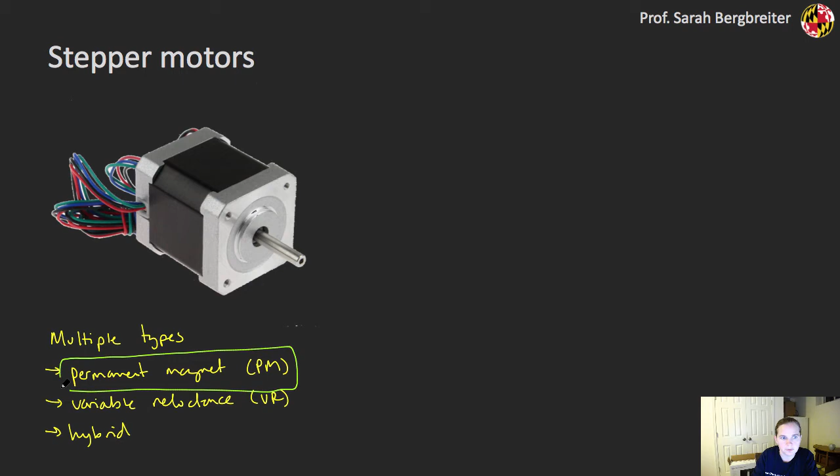So as we mentioned, these stepper motors allow us to get discrete steps in our actuation. So I can move from here to here in a particularly defined way. I don't necessarily need a sensor like we would have on a servo motor with a DC motor. This is built into the structure of the motor.

And the way this works is I have a rotor, and that rotor is going to have some poles associated with it. In this case, I've drawn one pole right here. And then I'm going to have coils on the stator. And these are hooked together such that this would be A and A prime. So the circuit equivalent of that is I'd have A and A prime connected together in series right here. So I have a single current basically going through both of these coils together.

And I have multiple of these poles on the stator, or we often call them phases as well. If I were to draw a two-phase permanent magnet stepper motor, in this case I have B and B prime, and I have my equivalent circuit over here. So this fixed thing right here is going to be my stator.

That's what's going to have the stator coils on it, and the number of stator pole and coil pairs, so that would be like A and A prime, B and B prime, in this case I have two of those, is going to be the number of phases in my motor. So in this case I have a two-phase stepper motor. If I also had a C and a C prime and a D and a D prime, then I'd have a four-phase stepper motor.

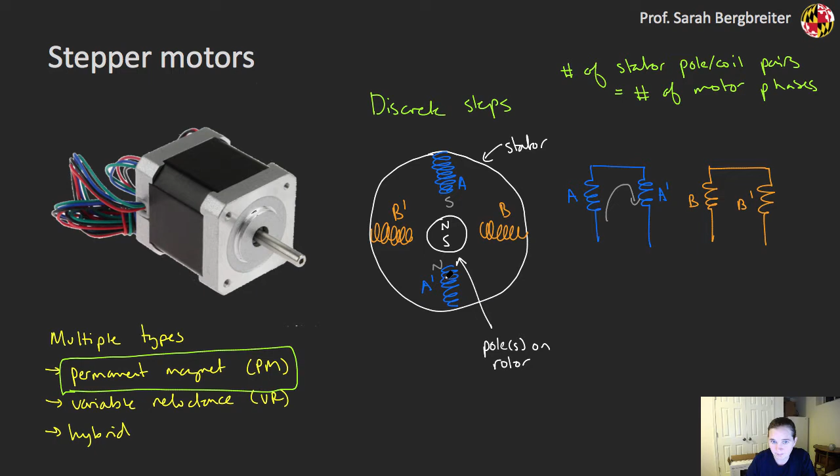Now, the basic idea behind this is that I'm going to run a current through these coils such that I set up these poles. For A, I would have a south pole. For A prime, I'm creating this kind of north pole, and my rotor will then line up with these poles on my stator. Let's go through the basic operation of how this motor would rotate around.

So I'm going to have a current going through those A coils, through A and A prime, such that I'm going from A to A prime, and these coils are designed such that that will give me a south pole on the A stator pole, and on the A prime I'll get a north pole right here. So effectively here I have a south right here and a north right here.

And what that's going to do is make sure that the rotor, and I'm going to use a single pole on the rotor, so a north-south effectively on the rotor, is going to line up in this direction. I'm going to draw an arrow here also indicating that, so we can see how that changes over time. I should also mention that when I have current going through this A coil, I have zero current going through my B coils. So that was my first step up here.

My second step is that I'm going to now have current going through my B coils, and I'm going to have this set up from B to B prime, such that B is now my south pole and B prime is now my north pole on the stator, and I have no current going through the A coils.

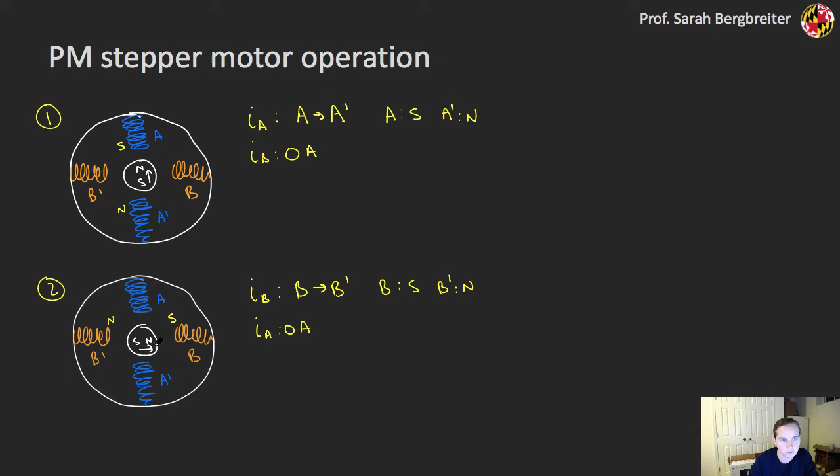And so once I've done that, now I've effectively created my north on the B prime, my south on B, and so that rotor is going to rotate to line up properly with that. So now I have north-south right here. I drew my arrow pointing to the north. So now I've rotated like this. This whole rotor has rotated in this direction.

So for step 3 here, I'm going to now have my current going backwards through those A coils. So I have a current going through A, but now it's going from A prime direction to the A direction. So A prime is now my south pole, A is now my north pole. I of course have 0 amps going through my B coil right here.

And so this is going to set up, in this case, a north right here, south right here, and I've moved from my north pointing toward B here to my north pointing toward A prime right here. So it's rotated again another step. And the 4th step here, I'm going to have B current, and I've rotated again in this clockwise direction.

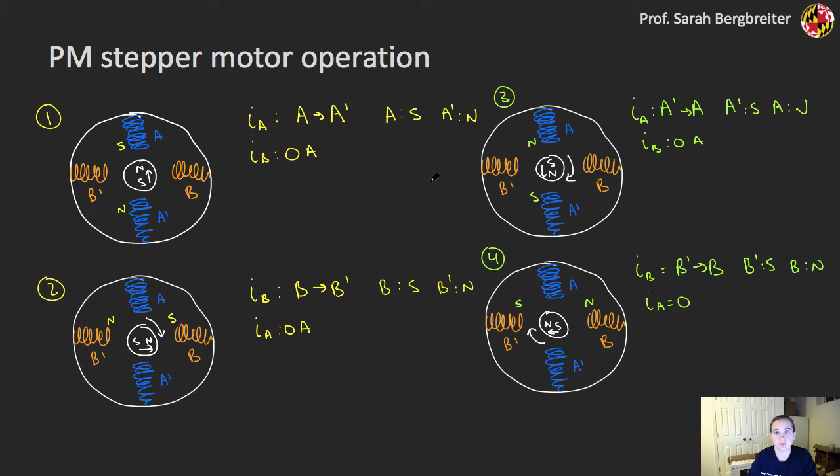So for this particular motor, I have 2 phases. I have 1 pole on the rotor, right? And there are only 4 steps here, so each step is 90 degrees. So I can position my rotor of the motor at 90-degree increments with this particular motor design. So obviously the number of steps is going to really determine the kind of performance metrics I'd be interested in for a stepper motor.

To calculate that, I'm going to define P as my number of phases in the motor and N poles as the number of magnetic poles on the rotor. And so my steps per revolution, I'm going to define as S. It's going to be 2 times P times N poles. Right? And this 2 times P is effectively the number of stator coils.

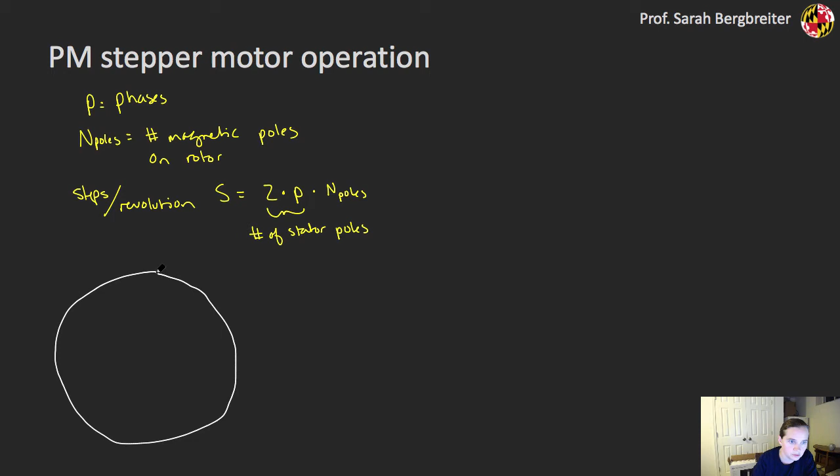So let's look at a far more complex example than I previously showed you with that 2-phase motor. In this case, I have 4 pairs of stator coils, 8 total coils there. So I have a 4-phase motor, so my P is going to be 4. I also have 3 different poles on my rotor, 3 different pairs of these north-south poles. So N poles here is going to be 3.

So the total number of steps in my stepper motor, S, is going to be 2 times the number of phases, 4, times 3, the number of poles on the rotor. So in this case, it's going to be 24 steps per revolution. And if I'm interested in the number of degrees per step, I'm going to take 360 degrees divided by S. So 360 degrees divided by 24 gets me 15 degrees per step.

So it's still a lot better than the previous example, when we had 2 phases and 1 pole on the rotor, in which case we got 90 degrees per step, or 4 steps per revolution. But depending on what you're trying to do, it still might not be great. So these are definitely a little bit limited in terms of the angular position that you can achieve from these motors.

So in addition to the stepping performance, another obviously important metric is going to be the torque that we get out of this motor. And the most important torque number that you'll probably get on a data sheet for a stepper motor is going to be the holding torque. That's the max torque that I can apply to that rotor before breaking that position.

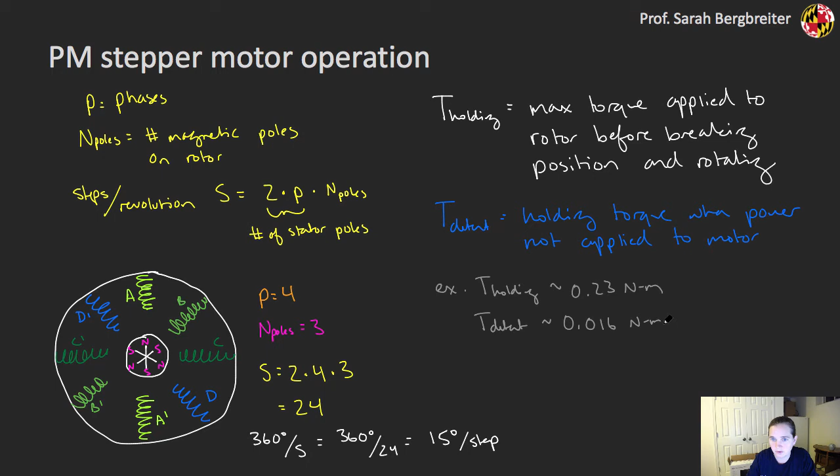So some typical numbers you might find for a particular stepper motor from a data sheet: your holding torque might be something like 0.23 Newton meters, and that detent torque would be more like 16 millinewton meters, so 0.016 Newton meters in that case. So significantly less, but still not nothing, right? That's definitely a reasonable torque.

My basic model for a two-phase stepper motor that I went through previously looks something like this, where I have the A and the A prime coils in series together and the B and B prime coils in series together. And when I run a current through in this direction, for example, I can set up particular magnetic poles on my stator poles. If I run a current through in a different direction, like this, I can set up the opposite magnetic poles.

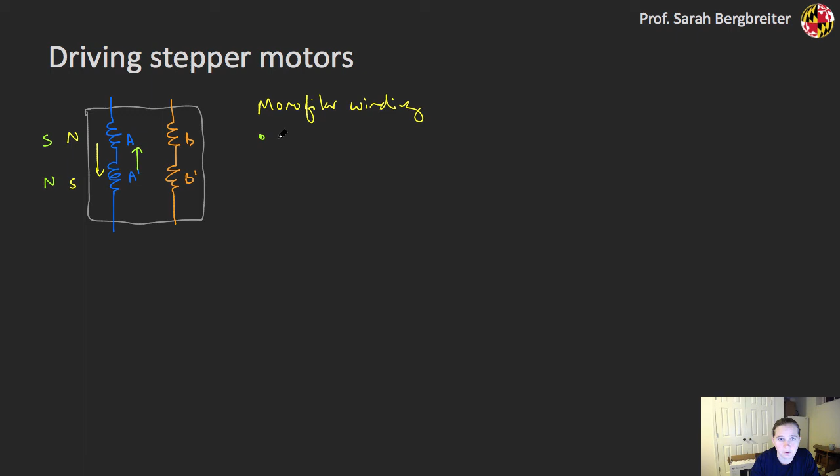So this particular configuration, and there are a lot of different winding configurations for stepper motors, but this is probably the most common, is called the monofilar configuration or monofilar winding. And a key point, if I'm thinking about how I'm going to drive these stepper motors, is that I need to be able to reverse my current direction. And these are going to require a fair amount of current, so typically more current than a typical digital logic system or a typical microcontroller can source.

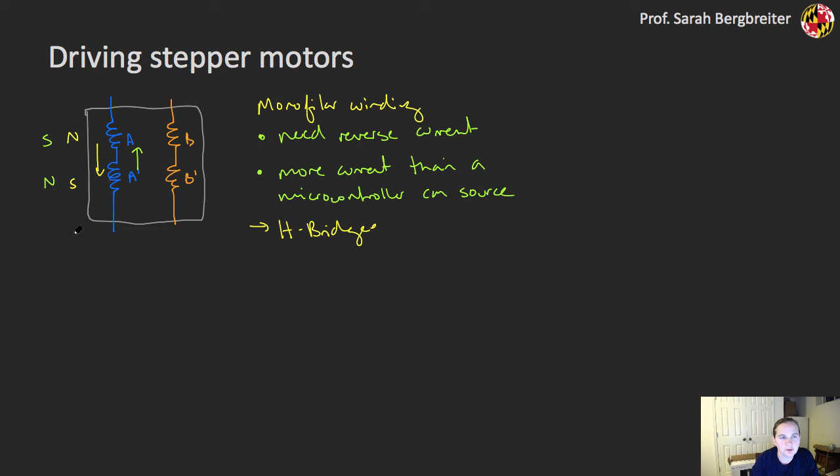So a great solution to this, of course, is H-bridge circuits. Of course, we'll need a full H-bridge for each phase, so the driving complexity and the circuitry required to drive stepper motors can be a little more complex than a basic DC motor. So here's our two H-bridge setup to drive this two-phase stepper motor. In this case, I have a full bridge on this side. Each of these is a half bridge effectively, and another full bridge on the other side to drive the B and B prime coils. And I've labeled these transistors Q1 through Q8.

I'm typically going to operate, for example, Q1 and Q4 together. So if Q1 and Q4 are both on, I'll get current going in one direction through here. If Q3 and Q2 are on, I'll get current going the other direction through here. And same on the other side, Q5 and Q8 are going to work together, and Q6 and Q7 are going to work together. So if I go through the steps that I went through previously to drive this two-phase stepper motor through the 4 steps that it's going to take, I'm going to start by driving current in this direction through my A and A prime coils. And to do that, I'm going to turn on Q1 and Q4 and effectively turn off everything else.

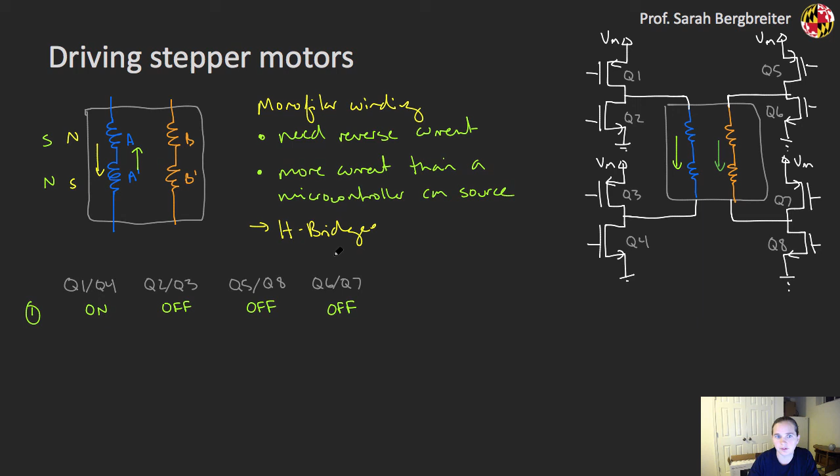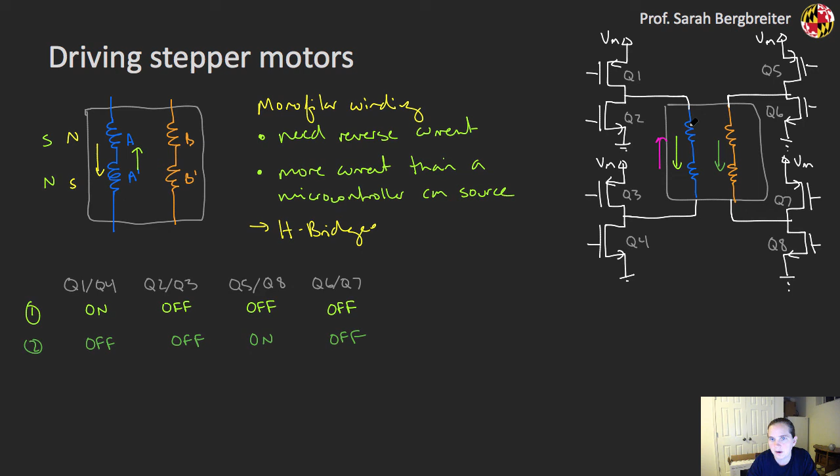Okay, the next step was to turn off current going through the A coils and turn on current going through the B coils in this particular direction. And so in that case, I want Q5 and Q8 to be on, and everything else should be off. Right, then I'm going to reverse my direction. So now I'm going to go back in this direction through the A and A prime coils. And to do that, I'm going to go from this V motor down here through Q3, through Q2 to ground. So Q2 and Q3 are both going to be on in this case for this third step, and everything else will be off.

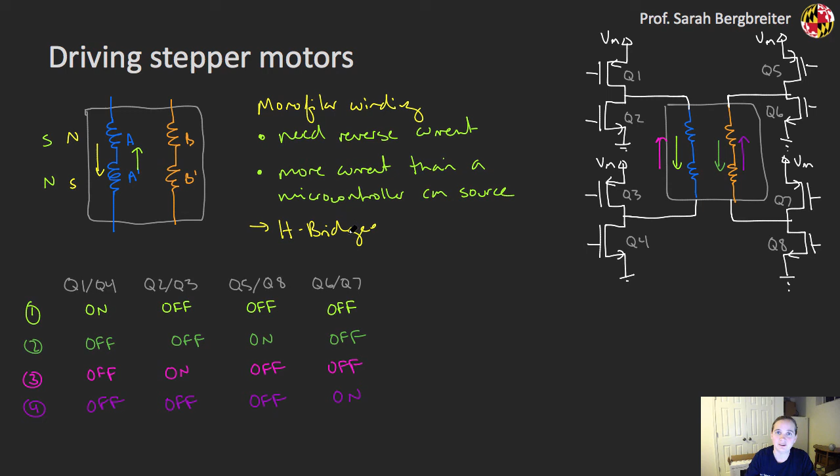And then finally, I want current going through the B coils in this case. So Q7 and Q6 are going to be on, and everything else will be off. And then, of course, I'm going to repeat. I'm going to go back to step 1, turn on Q1, Q4, turn everything else off. Right? So this would allow me to get through all of those steps. Obviously, if you have more phases, more poles, I'm going to take a lot more combinations of these in order to drive my motor around.